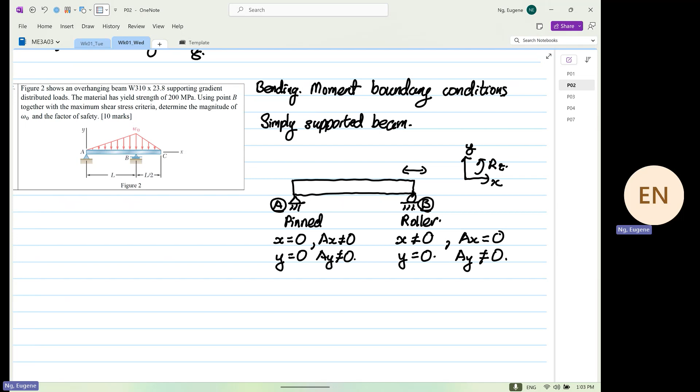For this case, right? For this case, AX is equal to 0. AY is not equal to what? So the rule is this: when motion is allowed, there is no reaction forces. Yes.

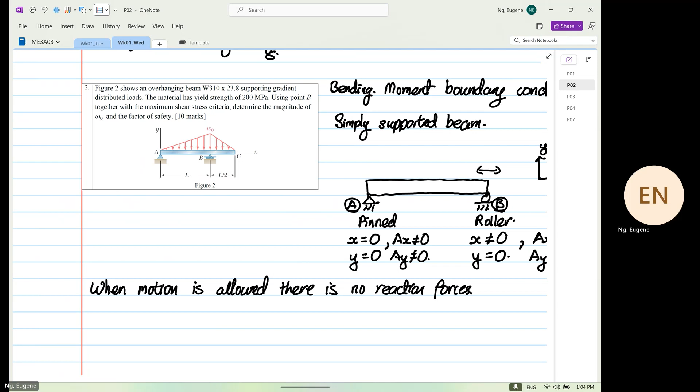Yeah. Thank you very much. Okay, I owe you a pint. Any mistake I make, you have a pint of beer. If you are Canadian, if you are from France, also a pint of beer, not a bottle of wine. Yeah, go. Okay. I hate it when I'm having fun. That's when the problem comes. You guys know that. Right.

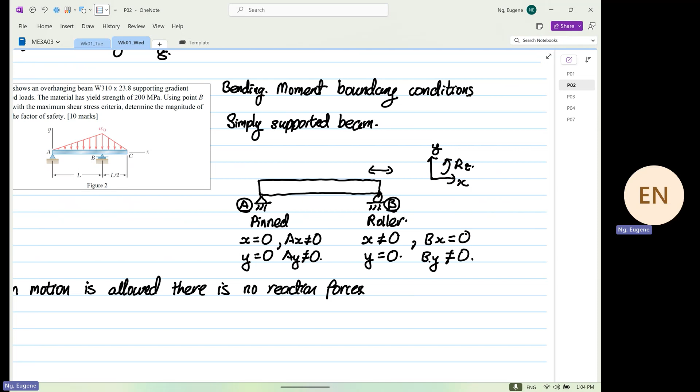So you can see that. Remember when I told you about when I would die when I jump from 5th floor? Yes or no? Right, when I jump from 5th floor ETV building, I was so depressed. Okay, if I jump, I will not die on the 4th floor. I will not die on the 3rd, 2nd, but I will die on the ground floor. Why? I stop falling. I hit the ground. Right? There is no what? Motion.

Don't memorize all this. Okay? Just think if you commit suicide, what will happen? So that's easier to remember, rather than this crap I'm writing: when motion is allowed, there's no reaction. Just think when you will die when you jump out. You think it's so much easier. Yeah? Right.

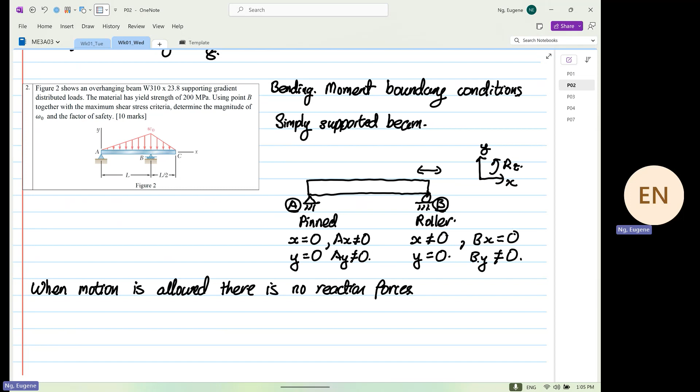I have to behave because we have visitors, okay? Now, let's look at moment. Moment is the part that is what? It's confusing, okay? And I don't want you to be confused. So let's look at moment for simply supported beam. Okay, let's look for a moment.

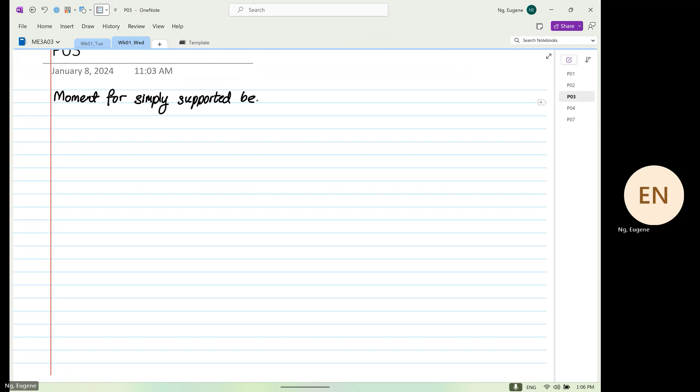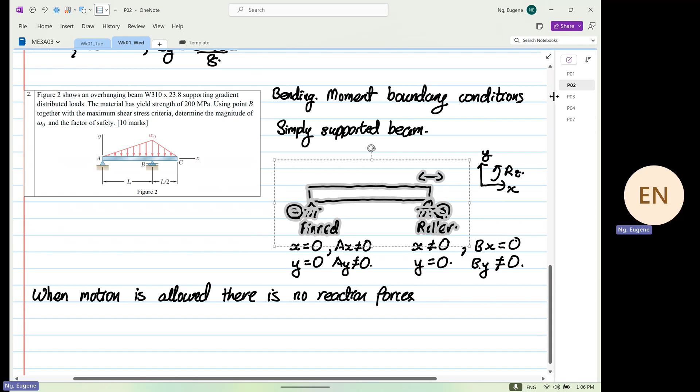Right after you guys wrote your final exam, I got COVID. And after COVID, I had flu. And I have not had a holiday. I'm a miserable bastard now, I'll tell you that. But having COVID is really good for me. I'll tell you why. I understand how you feel. Now listen, if you by any chance got COVID, let me know. Are we clear? I will extend your deadline. I'll move your term test. I was an ignorant bastard before. I could not understand. But when I got COVID, I was sick like a dog. And ask me to do this crap, I can't. Okay, so be honest about it, yeah? Don't be like, term test on the 4th of February, every father, mother, son got COVID. I need evidence, yes or no?

Why are the lights dimming? Hey? Is it dimming or is it me? Better now? Yeah, it was dimming. It was getting too romantic. I was very uncomfortable. Right.

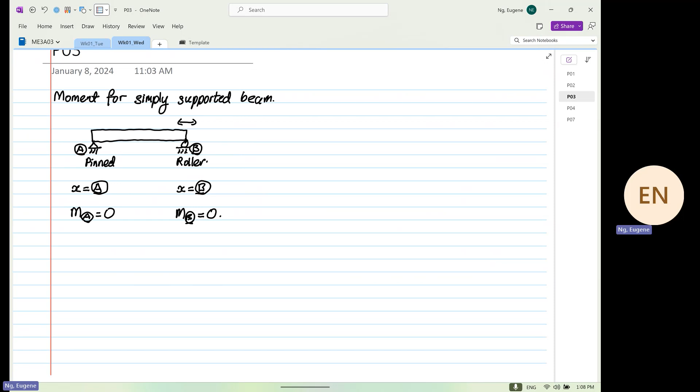So let's look at moment. Okay. When X is at point A and X is at point B, moment at point A is equal to 0. Moment at point B is also equal to what? 0. Don't memorize this. See it physically, what is going on. Why moment at point A is equal to 0 and moment at point B is equal to 0? And it's simply supported.

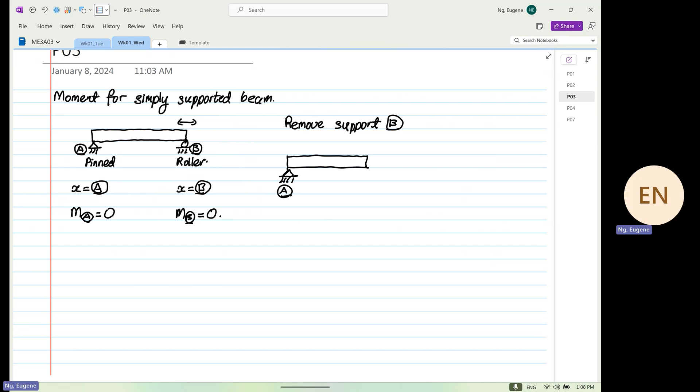Okay, so now we go to a case when we remove support at point B. When we remove support at point B, what will happen to the structure? It will what? Well done. So this is our support at point A. When we remove it, what will happen is the structure will tend to what? Will tend to rotate. Why will it tend to rotate? Because counter moment is what? Is missing. For this case, that is why moment at point A is equal to what?

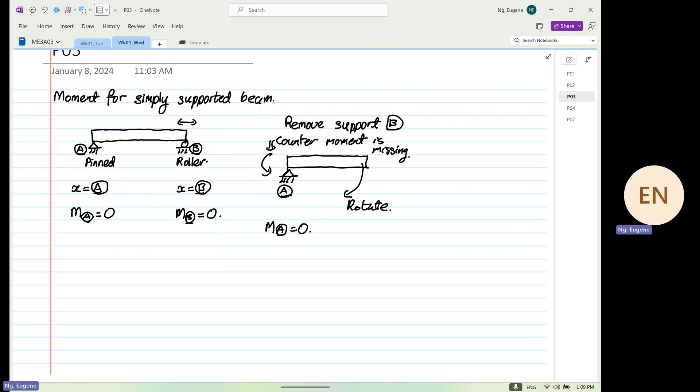You remove one support, X and Y will still be there. So it will not move in X and Y, but it tends to rotate about the what? The Z axis. Are we clear? Okay. Likewise, if we have another scenario where we remove support at point A, what will happen now? We only have a roller at point B. When this is the case, the entire structure will tend to rotate. That's why moment at point B is equal to 0.

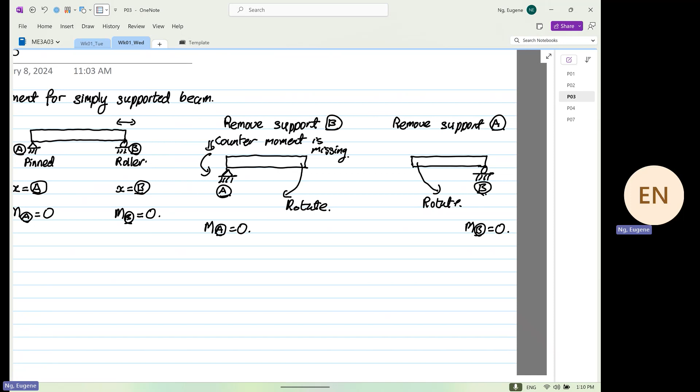A McMaster graduate has to know their boundary conditions properly. I've done consulting, and engineers don't know boundary conditions at all. Okay, not under my watch.

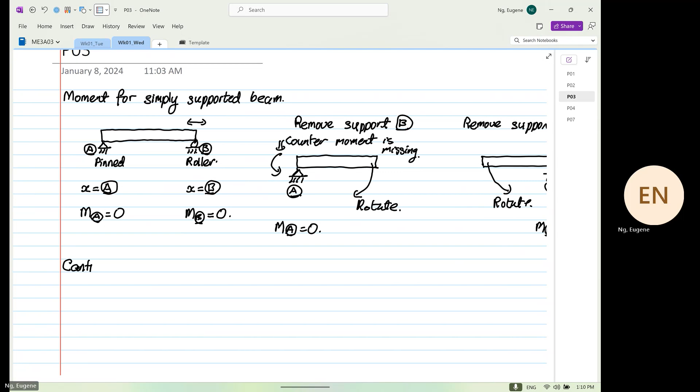The next thing we're going to look at is cantilever beam. So in a cantilever beam, you have a structure like this, and you have a load putting down here, for example. Okay, it can be without a load. And this is point A, and over here is point B. Okay, there's point A.

We know once we draw the free body diagram, this is our AY, and this is our moment at point A. Yes or no? That's our cantilever beam. So when that is the case, for a cantilever beam, moment at point A is not equal to what? 0. Can anyone tell me what is the moment at point B? 0 or not 0?

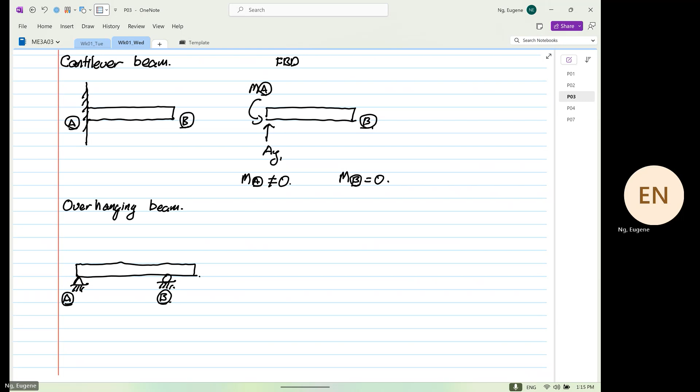What's the moment at point A equal to? Ask the question again. Apply what we just learned. What is moment at point A equal to? Why? This is not simply supported. This is overhanging. So when you remove B, A will fall. Yes or no? Moment at point B. Anyone?

You guys know that I'm honest, yes or no? Or you doubt that? Remember what I told you guys? What is coming out definitely comes out, yes or no? I'm honest, right? And I have to be honest to you down here also. I don't know. What? If you are not sure, what do you do? Be like me. What did I just say? I don't know. It's okay. I don't know everything. It's fine. Are we clear? Don't make an assumption that it's going to be equal to 0 and then it's 4. Don't do that. In this course, you have to be very precise. You have to be very exact. Are we clear? Right.

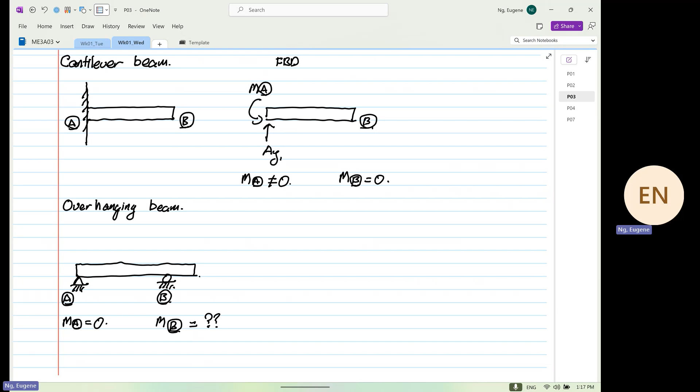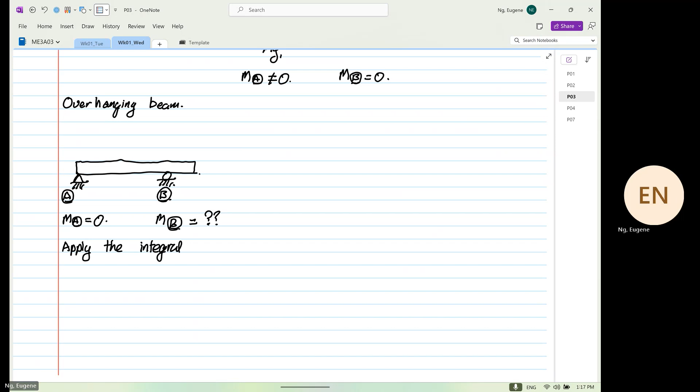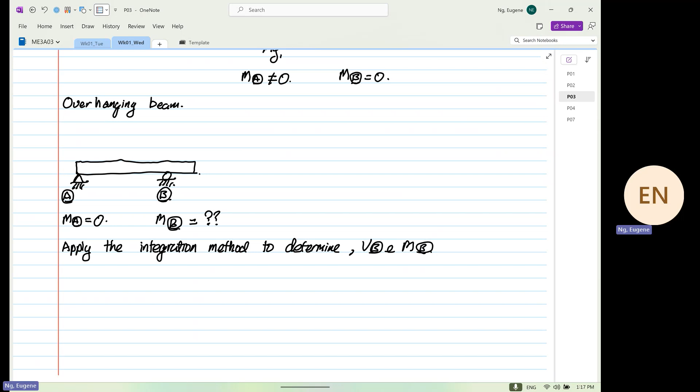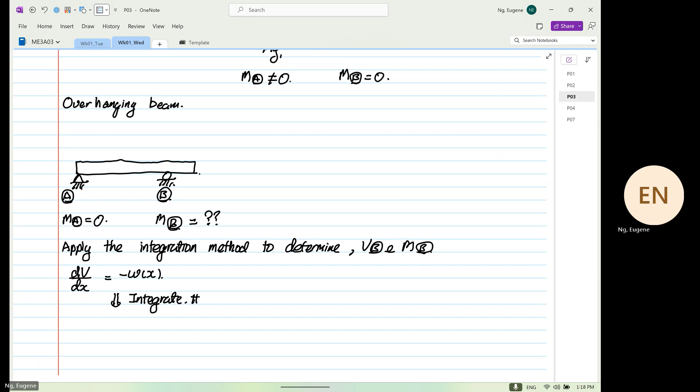So now, I know I went longer than before. Now you know about boundary conditions. And these are the most basic ones. As structural engineers, you have to know all this. So for the next case, we are going to apply the integration method to determine our VB and our MB. I'm going to write a few equations. Okay. So does this look familiar? Yes or no? So after this, when you integrate the first time, what do you get? Does this look familiar now?

Yes or no? And then we integrate the second time. Does that look familiar? Yes or no? To determine C1 and C2, what do you need? What do you need? Boundary condition. That is why the boundary condition is so critical. If your boundary condition is wrong, what will happen? Everything goes down the toilet bowl. Are we clear?